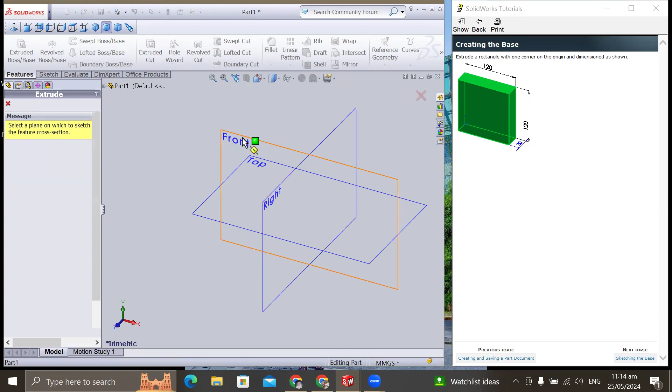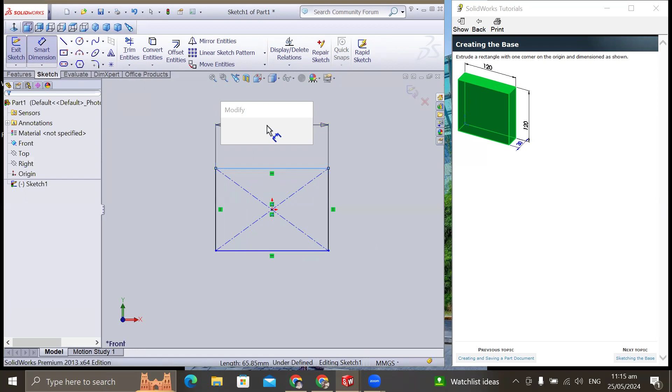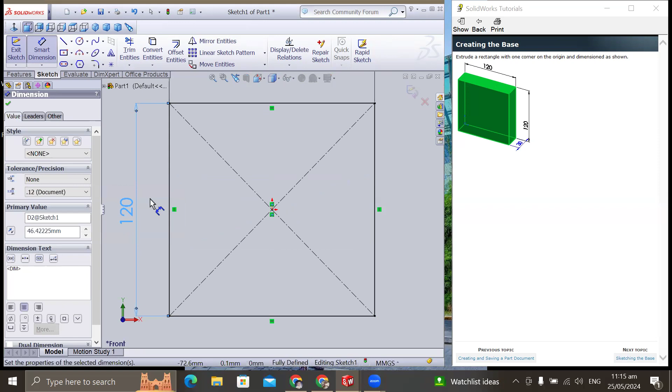Since this is the front view for our pacing in this area, we use the center rectangle. Just click on the center rectangle from the point of origin and make a rectangle, then identify the size configuration. From the instruction, we have 120 as the size modification for its length and width. Confirm or enter, and we also have 120 on this area, so let's type or modify the size to 120 on this construction configuration. With that, we have 120 by 120, so let's exit the sketch.

Let's follow the depth configuration. From here, we have a depth configuration of 30, so just type here the modify size as 30, confirm.

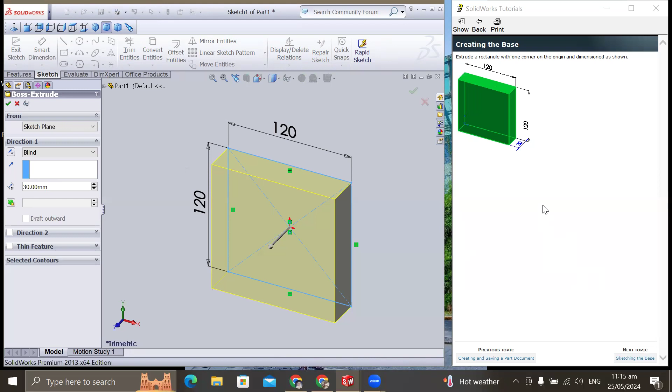All right, so with that we already made the first phase of our tutorial, without reading the previous topics or any part documents or the steps on doing this part. Because if I move to the next step, only then will I explain or go through the construction configuration. So it would take too long in this tutorial video if I went through it one by one.

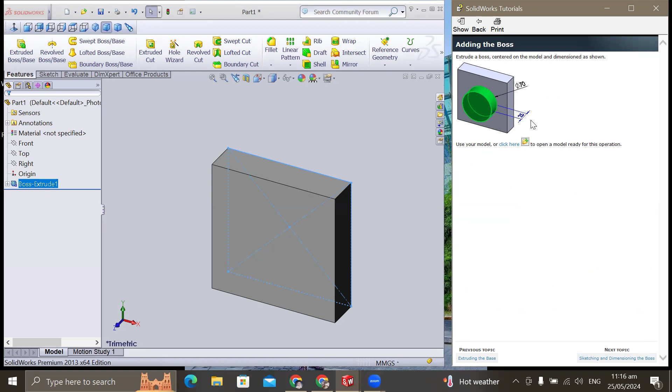So next phase, we have adding the boss features of circle construction on the middle feature of our square. Here, let's identify the diameter which is 70, and the depth will be 25. Again, we are going to use the extruded boss base from this part since boss features is what we're making. So let's use normal view for our drawing so you can better see the construction configuration. After having the relative plane, let's have the circle, so click on circle from the icon.

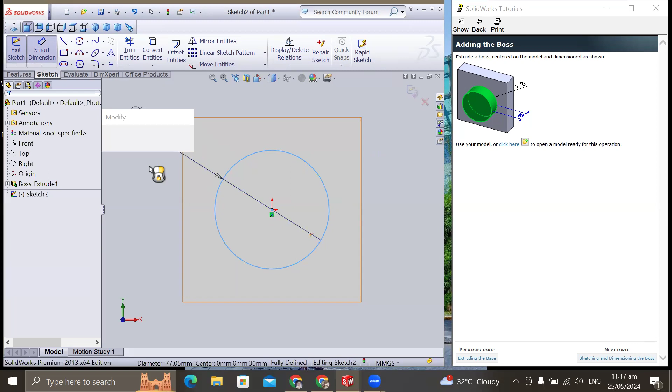A smart dimension using this area: click on smart dimension, then click on the circle, then modify the size configuration, which is 70. Then enter.

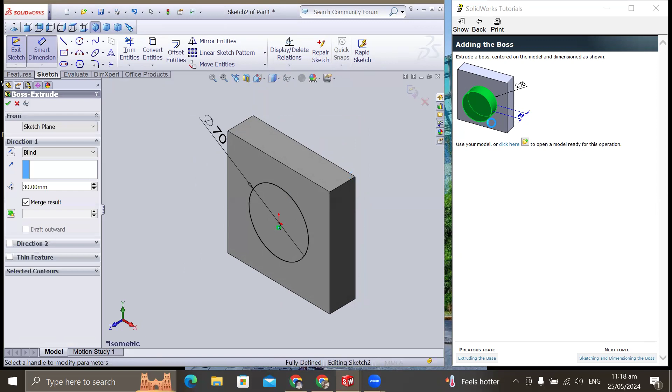Before I exit the sketch, let me click on the pictorial view. Okay, exit sketch, and then let's modify the size configuration from this construction, which needs 25mm in size for our depth. I'll just double enter to confirm, and we have the second phase of our drawing problem.

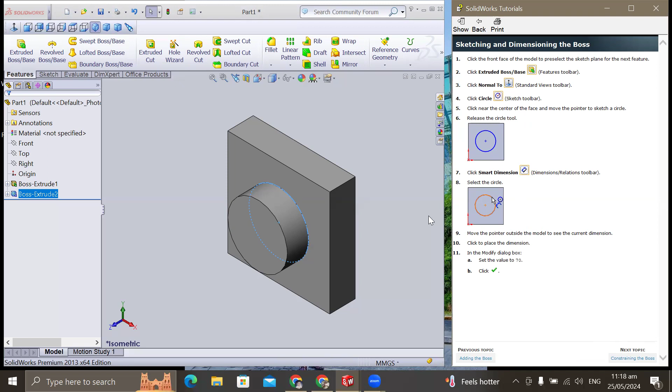If you want to read the construction configuration on sketching and dimensioning the boss base by constructing this figure, you can also read our step-by-step process. But as I said, I'll do the shortcut so the video stays short.

On our next page, as you can see, we have another circle on this construction area, related to the circle we made earlier. But this time it's a hole, not an extruded boss base. So now the feature we'll use here is a different kind of feature that we've often used even before in our previous working drawing plates.

Let's now try the extruded cut from here. Extruded cut, click on the part where we'll place the hole, and then let's get a normal view position.

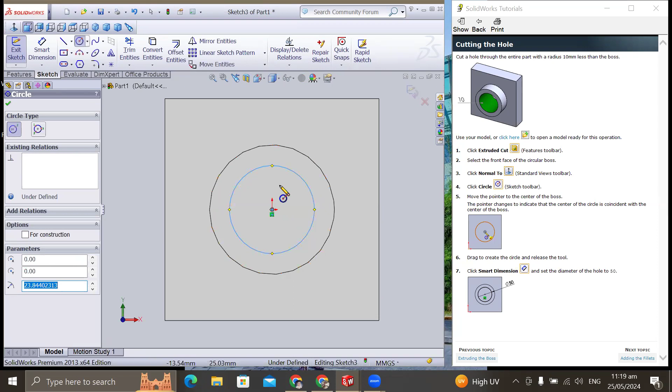Let's construct the next circle. From the point of origin, put the circle you're making as the reference for your center point, then smart dimension.

Upon knowing the construction configuration on this side, it says that in this relative position, going to the offset part of the circle, it has a measurement of 10. But if we study the unit of measurement from the circle-based construction, we have what we call radius and diameter.

Since there's no reference to diameter on the 10 offset in this construction area, we'll suppose that this size configuration is in radius. So if this is radius 10mm, we just have to convert it to diameter. Since the one we used earlier was diameter for the previous circle, which is 70, we'll convert this size description to diameter, so the 10 becomes 20.

But if we study the base construction configuration, since we have 70 on the diameter, we just subtract the diameter size of 10, which is 20. So 70 minus 20 leaves 50. So our modified size from this construction will be 50, so you won't get confused in the construction area.

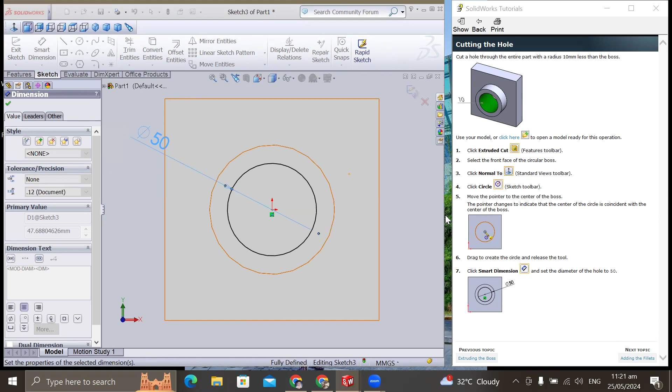So 50 on this part, then confirm. And to confirm further, you can see below that in the smart dimensioning process configuration, we have 50 on the diameter for this step. So just simply confirm the dimension.

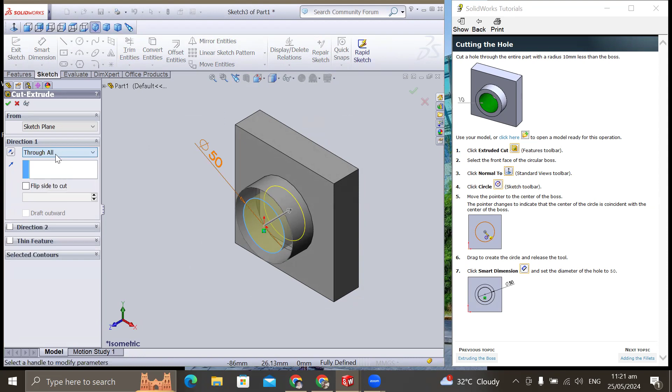Before we exit sketch, let's go back to an isometric view. From the isometric view of the object, let's exit sketch from here. Then after clicking exit sketch, modify the construction features so the hole goes through to the back of our object—just change blind to through all. With that confirmed, we now have the second and third phase features of our step tutorial for this part component.

Next, let's now move to the next phase, which is what we call the fillet features. In the fillet features, as you can see in the construction, we have two measurements used: radius of 5 and radius of 1.5.

If you analyze the figure in the tutorial, let's first do the construction configuration for all the radius of 5, so it's just one selection for all our placements. So let's now have the fillet command from here.

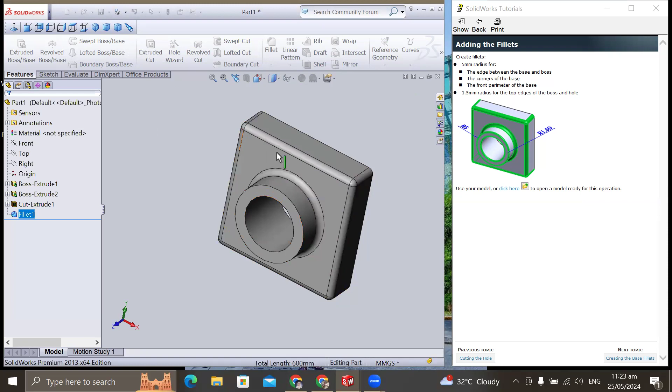So just simply rotate the object and select all the necessary parts, and we'll put a radius of 5. Just simply type the items, select radius with a default size of 10, and change it to 5. Then simply enter or double enter the object to apply the radius configuration of our 5 size.

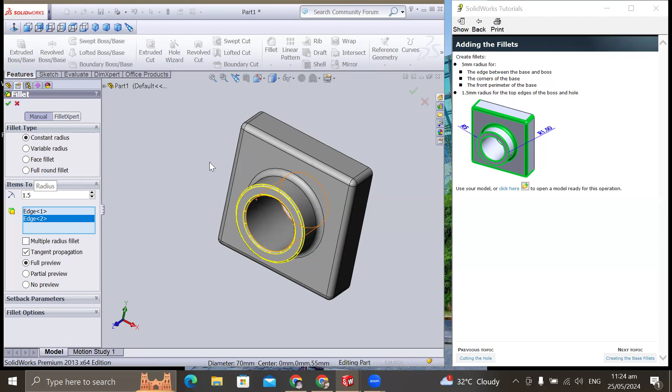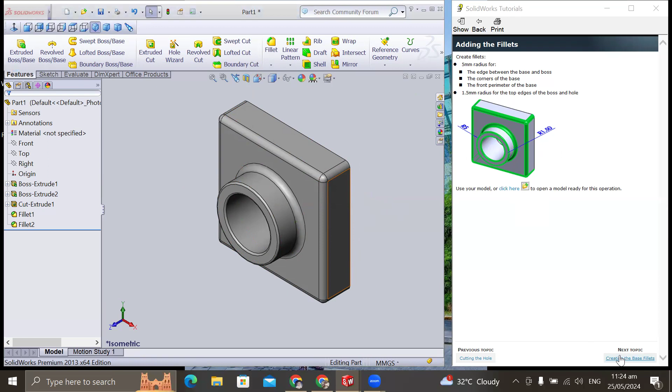So if earlier we used 5 as the radius, let's now have 1.5 for this construction. Double enter again to apply our radius. As you can see, the preview of our construction has changed, and with that we've applied the base of this object on the lateral area. If you compare the tutorial and the process of construction, there's no difference in terms of its terms.

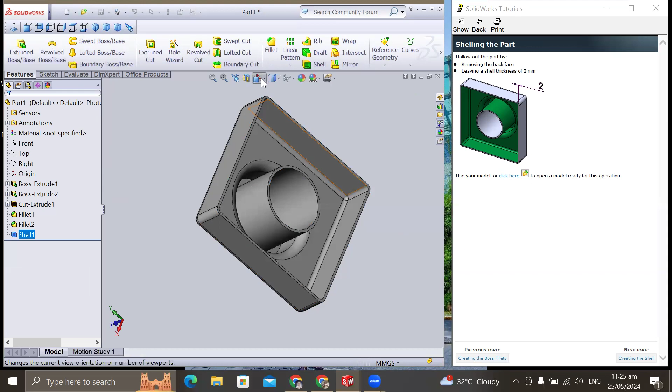Since this is a lesson about assembly, we should make more than one component. So I'll just save this first on our desktop as part 1.

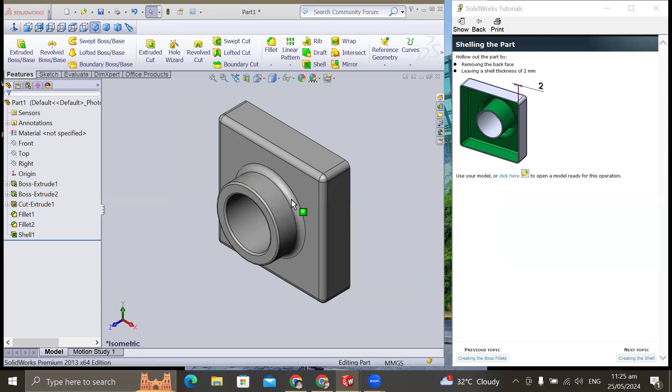Next, let's have another document on this page for another part component, the presentation of our part 2. For part 2, if we go back to the tutorial page of our drawing, I changed the size indicated here, because if we follow it exactly, there would be too many construction phases and it would take too long.

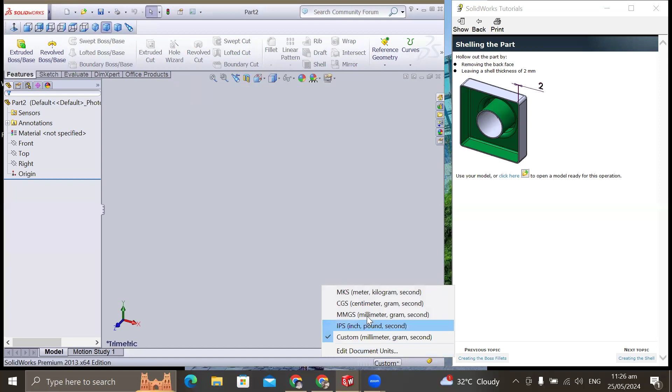So simply, for our part 2, change the unit of construction to MMGS again, and then use this size configuration. Let's note this so you won't get confused.

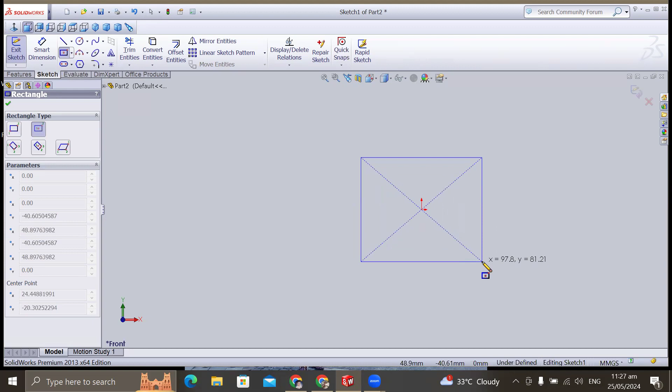Let's have extruded boss base again, then use the front plane to activate the feature base command for this construction. Using the same process as before, have the center rectangle as the first feature command to use in the sketch. Then smart dimension with the same dimension we used in the construction of part 1, 120, and another 120 for its length.

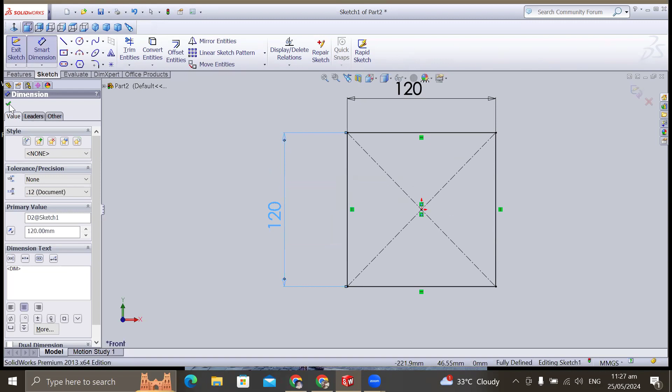Next, we are going to exit the sketch. Earlier we used a depth of 30 on part 1, but this time our part 2 will be a bit longer, so it will be a size of 70 in depth.

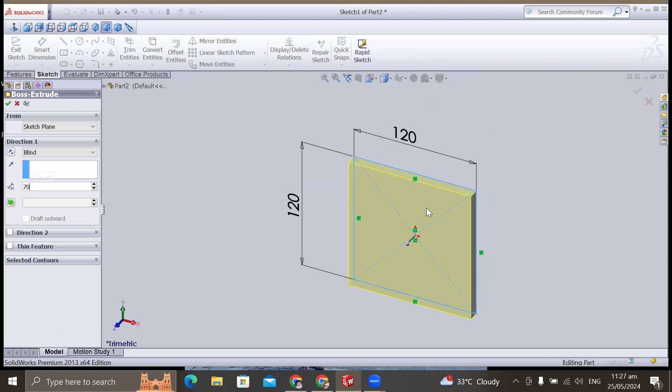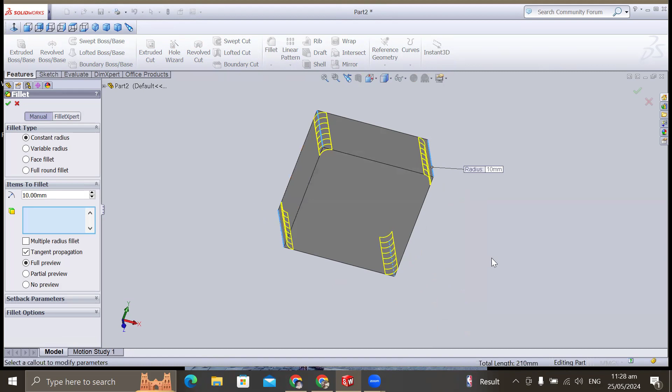We'll just use the fillet command on the second phase of this drawing. All the corners, we'll click those together with the back face features of the box we made. So here at the back, just click around the lines. No, not that, let's redo it.

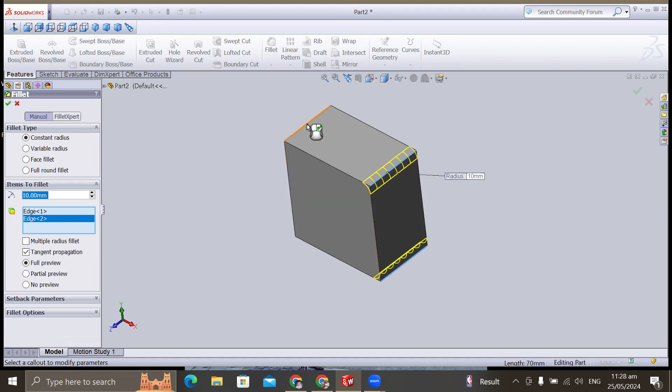X ko yung part na select natin kanina. Ulitin natin siya, fillet, yung mga corners. Ito lang po yung hindi okay kapag sa fillet. Pag meron tayong nagkamaling features, pwedeng i-unselect, pwede nating ulitin yung selection faces. So from here, ito po yung tatanggalin, i-aapplyan ng fillet.

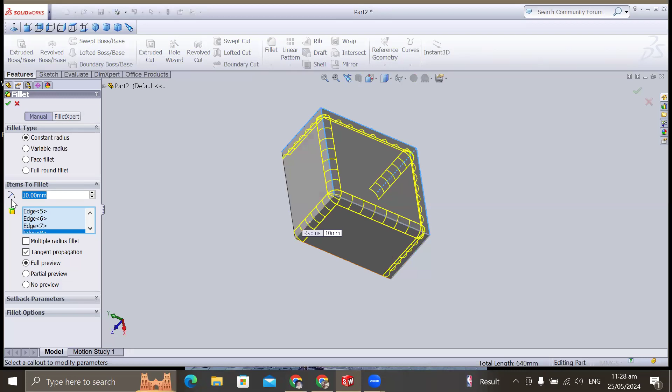Okay, and then yung faces na natin dito, ayan lang po yung mga selection with the same items to fillet, or parameters for this size construction will be in 10mm. Just simply apply it, double enter, and with that we have this space already. So ibalik natin sa isometric view para hindi mukhang magulo yung ating drawing.

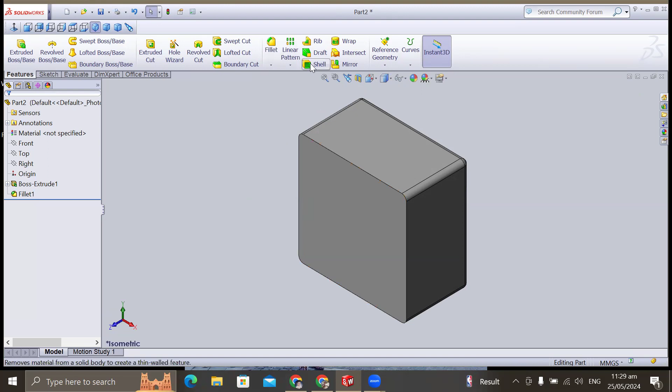Next, right after having this, let's now have the last part for position, which is the shell command. So just simply click the shell, then click yung pinakaharapan naman this time, kasi yung kanina likod yung ating ginawa as shell construction with a 2mm thickness. Dito naman, 2mm din.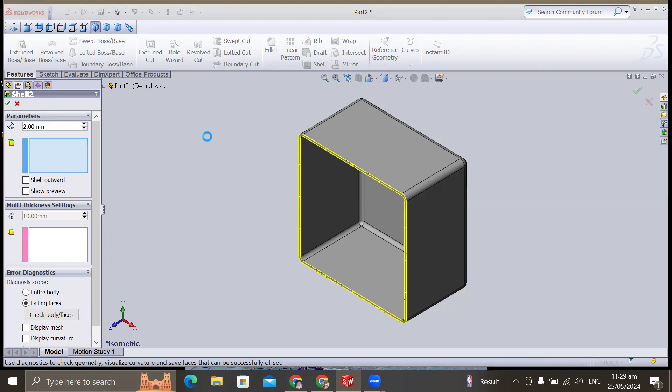Okay, and then ito po yung magsisilbing part 2 ng ating construction. So just simply save the object or save the documents. Confirm muna natin itong shell para mag-save tayo later. Kapag ayaw, i-exit nyo lang. Naka-apply naman na yung ating shell. Okay, so file,

then save as part 2. So lagay ulit natin siya sa desktop ko, desktop as part 2. And then lagyan din natin ng pangalan. So kung mapapansin niyo, meron na tayong dalawang file from this object. We have the part 1 and the part 2 already.

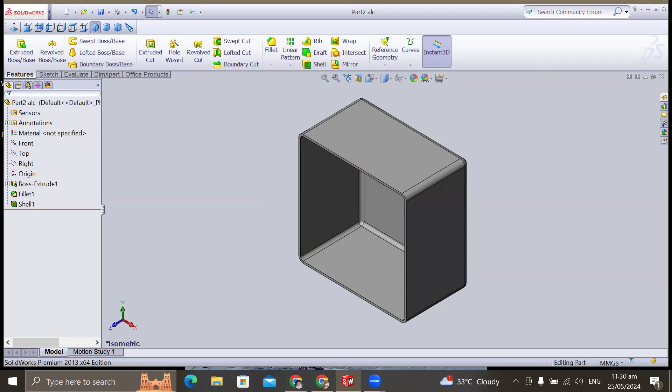Ngayon, dito na po papasok yung paggamit natin ng tinatawag nating assembly. Assembly, the assembly constraint. Dito sa ating assembly, hindi natin siya madalas nagagamit during the midterm, but this time in finals, meron na po tayong mga component construction ng machine na gagamitan po natin ito. If we are going to study on the assembly constraint under the assembly component of SolidWorks, madami po tayong dapat alamin specifically sa mga arrangement ng tinatawag nating mate forms. Pero today, ang ibibigay ko lamang po sa inyo yung pinakasimpleng features kung paano natin ginagamit itong assembly.

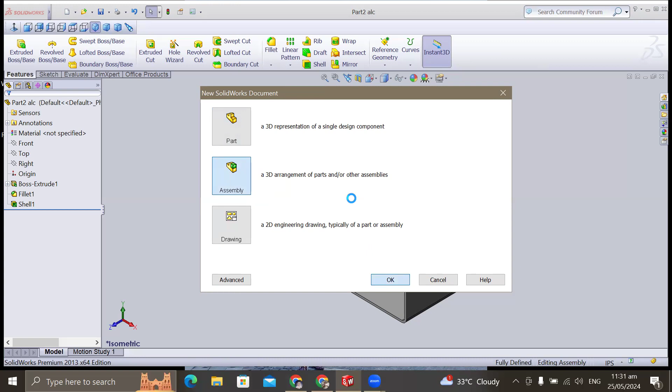Just click assembly from here and then okay. So from that, we are now going to apply the construction-based area of that drawing, dito po sa paggamit ng ating assembly. So this is just an introduction. Siguro by next meeting, we are now going to study on the different forms of assembly constraint together with the components. Pero sa ngayon, we just have to explore the basics.

So just browse on this file, the file drawing kung saan nyo po sinave yung inyong mga parts na component. So we have here the part 1 and part 2, part 1 ALC and part 2 ALC. Dito po activated na siya kasi ito po yung mga recent na ginawa natin. Pero pinakita ko lang sa inyo, if ever na wala po dyan, just browse it from here and hanapin nyo lang po yung file. Then open.

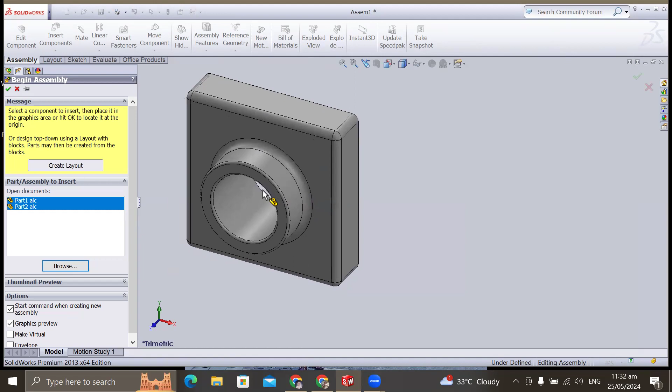Alright, so pag-click po ng open, magpi-preview po dito yung part 1 features natin since we are selecting it already, part 1 and we have here the part 2. So magsasama po sila sa isang feature-based construction dito sa ating assembly. Dito lang po yan nagagawa doon sa part component ng ating SolidWorks. Now, how are we going to assemble these two parts of machines? Dapat magsama po sila in one particular assembled machine. So we have to use the mate command from here.

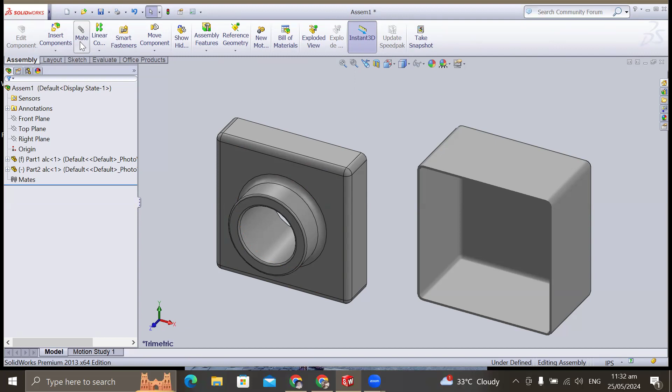Kaya lang, if we are going to use this, pag kinlik ko to, marami pong mga construction phases na pwede po tayong magamit from the mate command. So ito i-discuss ko pa po next meeting. So for the meantime, gamit po muna tayo ng default features. In this construction, mas madali pong i-select yung corner side dito po, yung parang may arc dito.

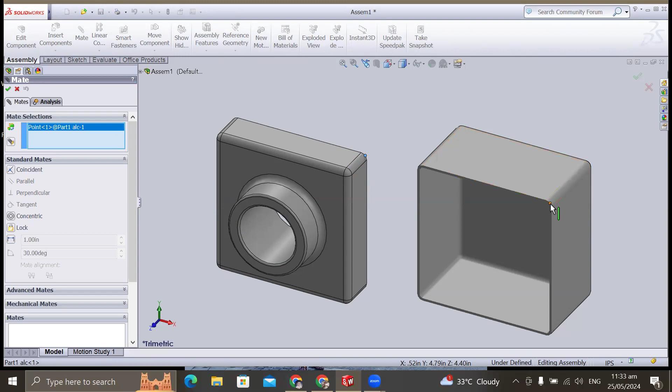Ayan, pag nag-click po yan or nag-preview po yung point na yan, click nyo lang po dito sa part 1 and click din po kayo dito sa part 2. You are going to click that. So you can see, didikit po yung object dun po sa face part ng object on the part 1 and the second face on the part 2. Ganyan po yung mangyayari sa lahat ng construction ng iba't ibang machine parts na gagawin po natin.

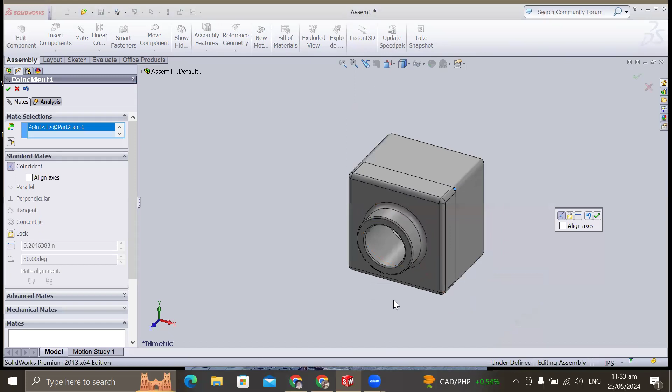If nakita po ninyo na walang problema pagdating dun sa assembled features and nagdikit naman po sila without any problem, then just simply confirm or check this area, or enter. Marami tayong option, no? Pwedeng dito sa part na to, just check on that, check on here. And then, ito na po yung process assembled ng ating machine drawing.

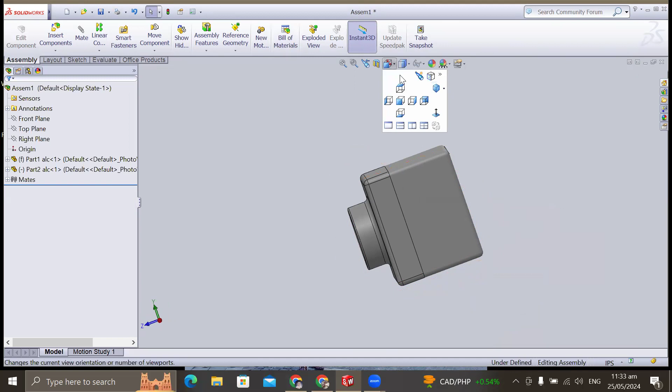So this is just a simple instruction on how we deal with the assembly on the component features ng SolidWorks, ng assembly component. So dito po, isi-save na rin natin siya. Save as part component, or I mean, the assembly component as Assem1. And then lagyan nyo lang po ng ating tawag dito, file name. Okay, just simply save it. And with that, we have the end output for our activity number 11.